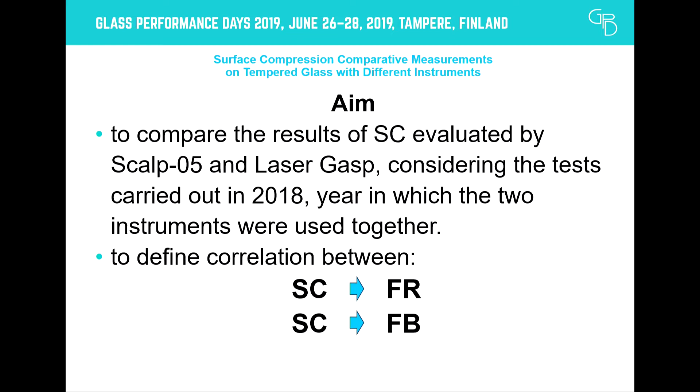The aim, as I told you, was to compare the results of the two instruments, and we took only the tests done in 2018. We focused only on the year in which the two instruments were used together.

That means when we received samples from a producer wanting to do the initial type test, we didn't measure with only one instrument, but with both. Then we tried to define a correlation between the surface compression and the fragmentation, and the surface compression regarding the flexural bending.

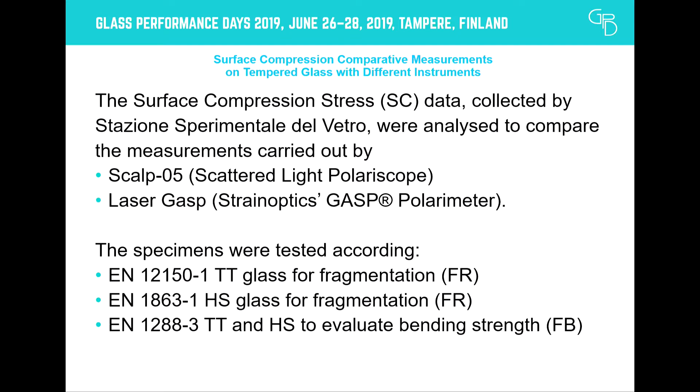The specimens were tested according to the standards 12150, 1863, and then the bending standard 1288-3. The two instruments are these: the Strainoptics GASP Polarimeter, and Scalp.

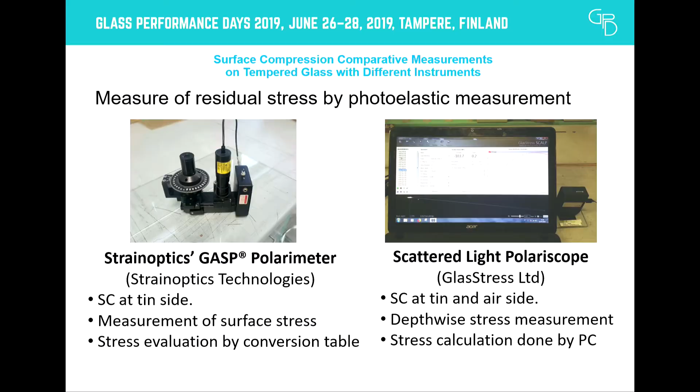I would like to tell you that we were the first to introduce both these instruments to the Italian market, proposing to Italian producers to use them for their factory production control.

You know that the Laser GASP measures only the surface compression on the tin side, while the other instrument measures on both sides.

The stress evaluation is based on a conversion table and a calculation by PC. Then there is another question - sometimes we have an asymmetric stress induced by the thermal process.

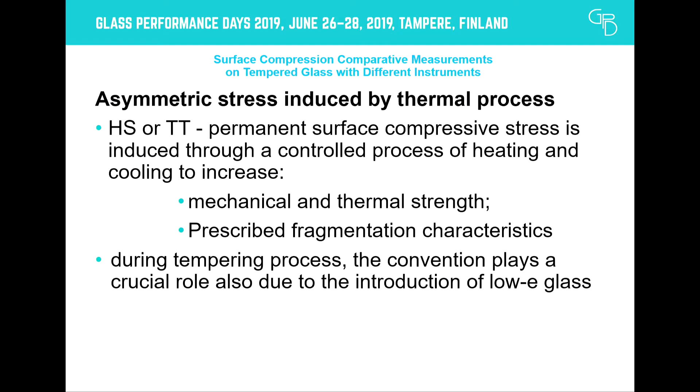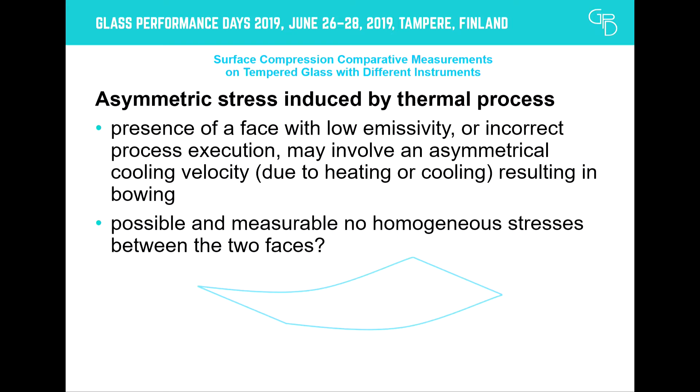This can depend on heating or cooling. During the tempering process, convection also plays a crucial role in the introduction of low-e glass. Sometimes we can have asymmetrical stress induced by the thermal process due to the presence of a face with low emissivity, incorrect process execution that can involve an asymmetrical cooling velocity due to heating or cooling as well, because what is important is the cooling velocity.

And we ask ourselves: is it possible to measure non-homogeneous stress between the two faces if we have this? This is the second part of the work that we have tried to do.

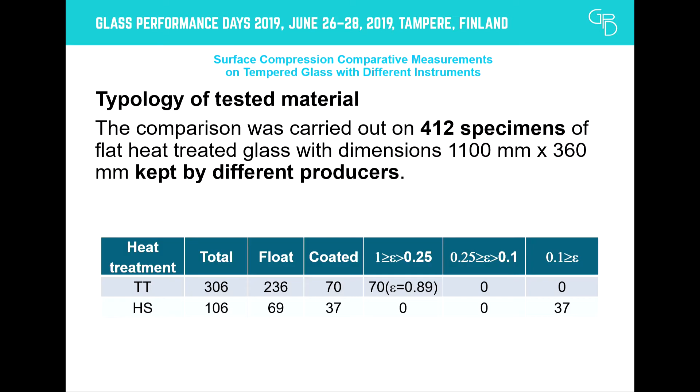These are the samples that we received this year and used to make the comparison. So we didn't produce the samples ourselves, but used the ones we received, so the sampling is not very complete.

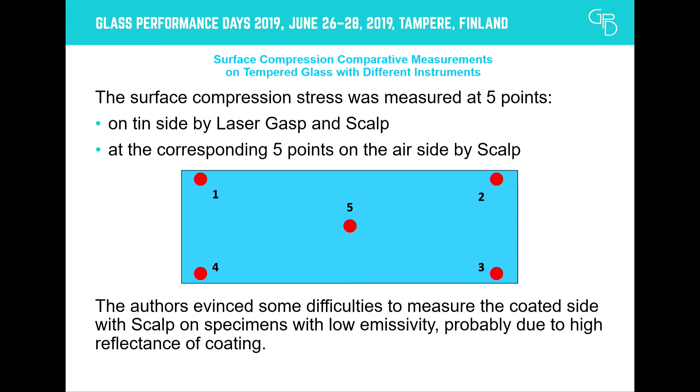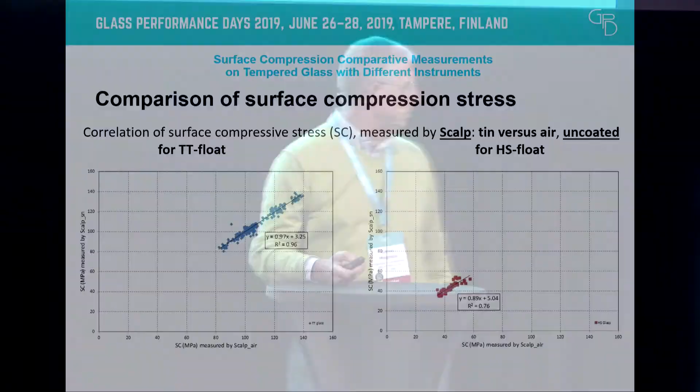And at least this is the correlation, and you see that with the SCALP, the correlation between the two sides on tempered glass is a very good curve. That means that if you measure the tin or air side, we have the same value. This is a very good correlation, and we have the same for the heat strengthened glass.

It's a little bit less, but this also depends on the small number of samples. But anyway, 0.76 is reasonable given this type of question.

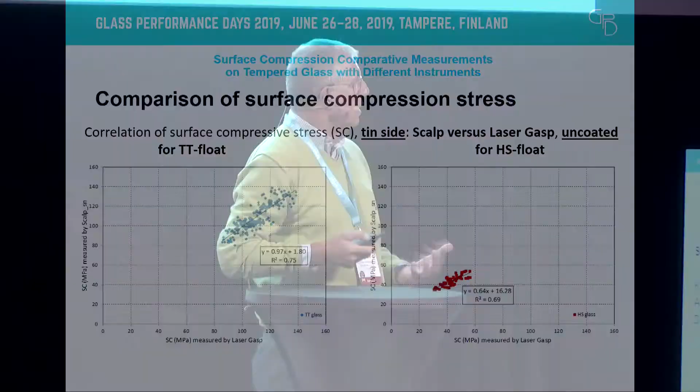Now we go to see SCALP versus Laser GASP for uncoated glass, and you see that the measurement of SCALP and Laser GASP fit with 0.75. So we can say we have good correlation between the two instruments, as well for the heat strengthened glass. But again, the problem is that we have a small number of samples.

Then we go to see what happened with coated glass. You see that on the tin side, the correlation between the two instruments is again good, and at least better for the heat strengthened glass. So we can say you can use one instrument or the other - it's the same. This is the real aim.

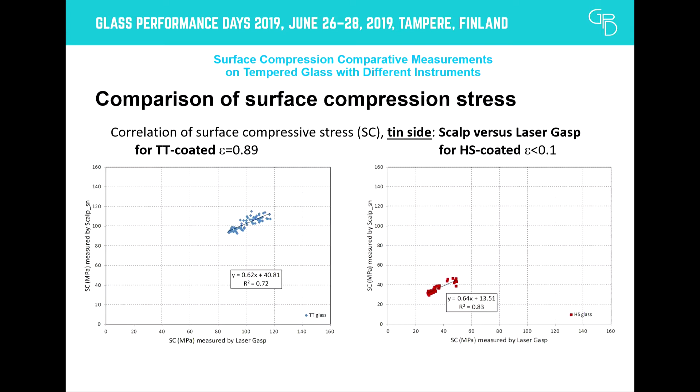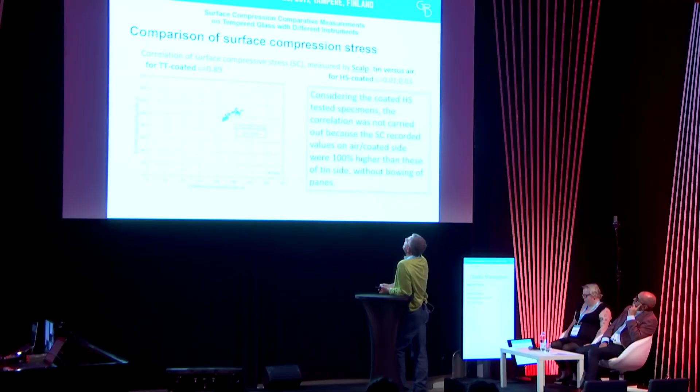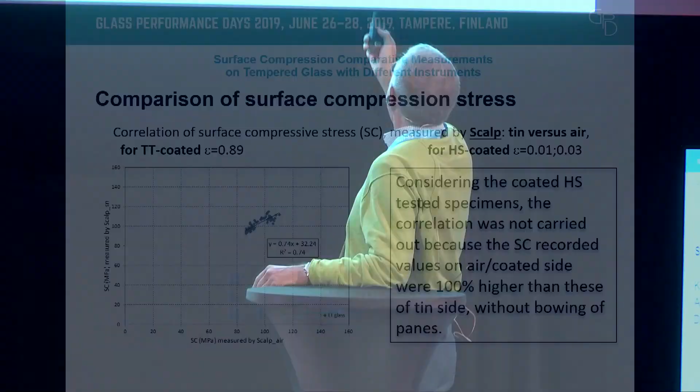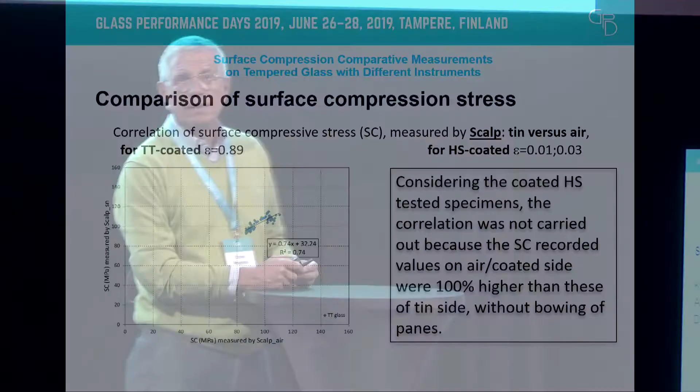When we go to SCALP tin versus air, you see that for coated glass, it works when the coat has high emissivity, pyrolytic coat, just to be clear. When you go to low emissivity, which is confirmed by the people who invented the SCALP, it doesn't work very well - we get very, very high values of measured surface compression.

So there is a caveat: normally this kind of coating is placed on the internal side of double glazing, if you have to measure in situ. So you cannot measure it if you have to make an expertise. But I know that my colleagues are working to elaborate on this.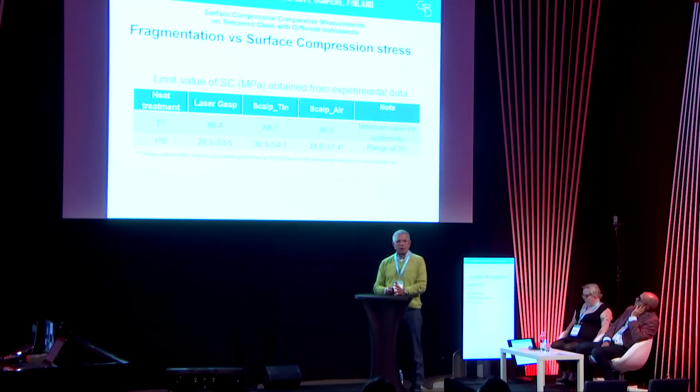Indeed, I'm not sure these values are very much in the safety area. In previous work, we proposed to stay always over 90, but okay, it's nothing, that's not true. And for coated glass, we also proposed to stay over 95 for certain kinds, but it's not the case here to speak about.

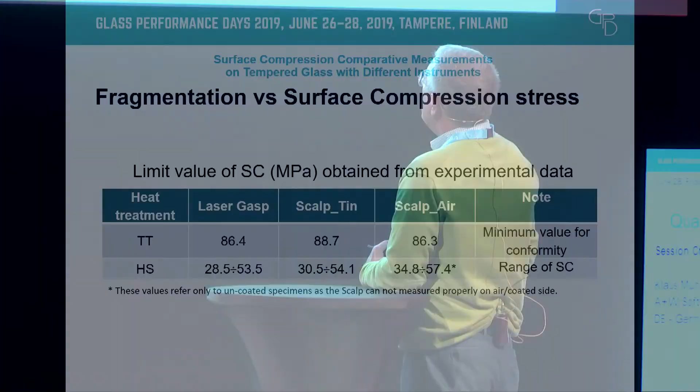For heat strengthened glass, we say that all the samples we tested stay in that range, okay? That doesn't mean you cannot have conformity at lower or higher values. It means that the samples we have and measured have this value and are conformant to the requirements.

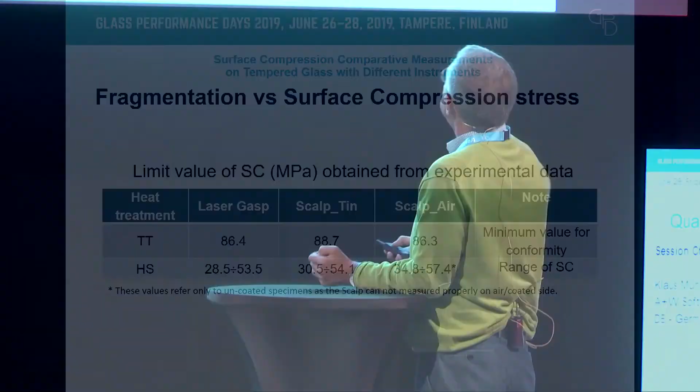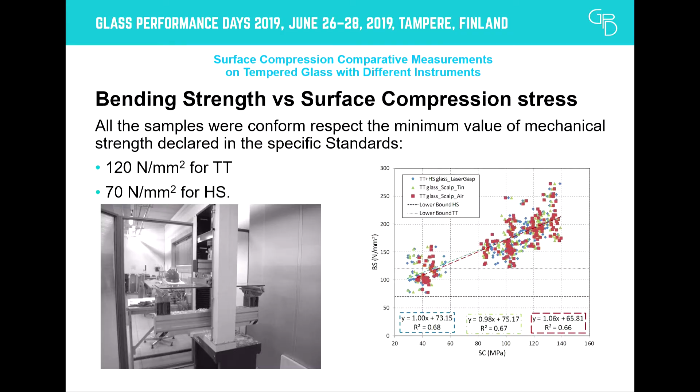Okay, and these are the correlations with the bending test according to standard 1288-3, and you see that the R-squared values here are 0.68, 0.67, 0.66. So they fit very, very well with each other.

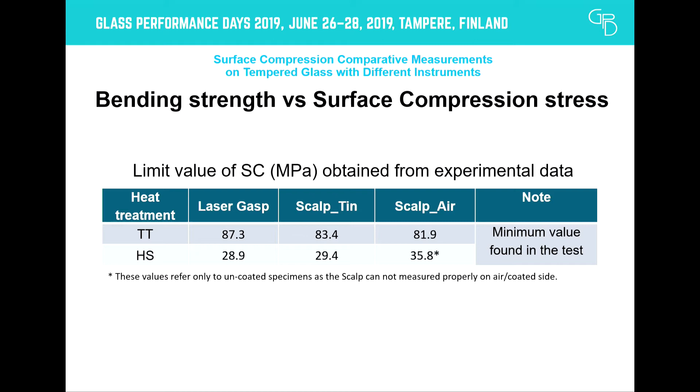This is the limit value to have the minimum conformity, but we don't suggest using this value. To be sure, we suggest to stay more than 90.

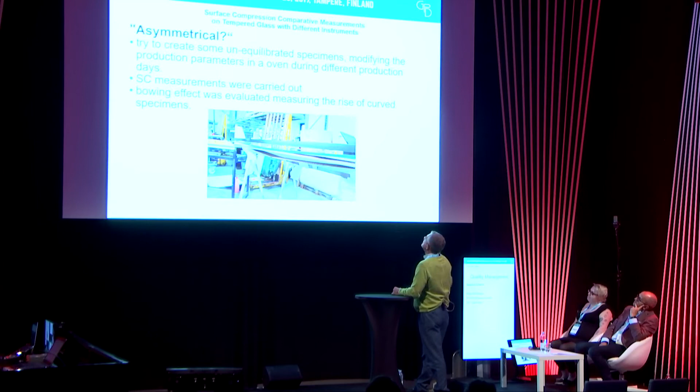We see that the overall bow we were able to create, we arrived till 19 millimeters. You see that we have some difference between tin and air with scalp, in the two surfaces. But in most cases, we don't appreciate a lot of difference, especially with small bow. And my friend from Laser Gasp scalp production, they say it's clear. Why? Because even when it is curved, the two surfaces should be in equilibrium, so it's not so easy.

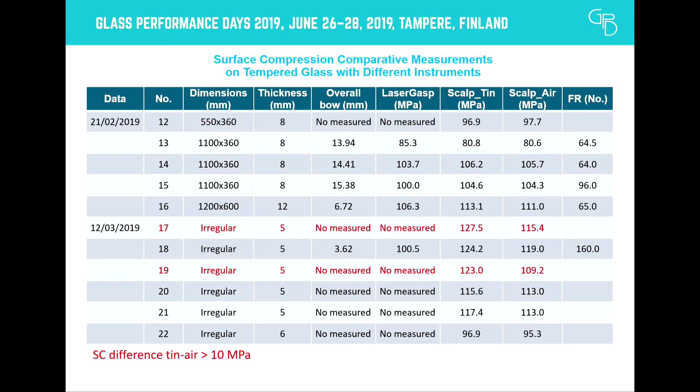But sometimes we see that we have at least 10, 15 MPa of difference, that is something appreciable. But you see the value of the bow is very different. And you see here again, some difference. So the conclusion is...

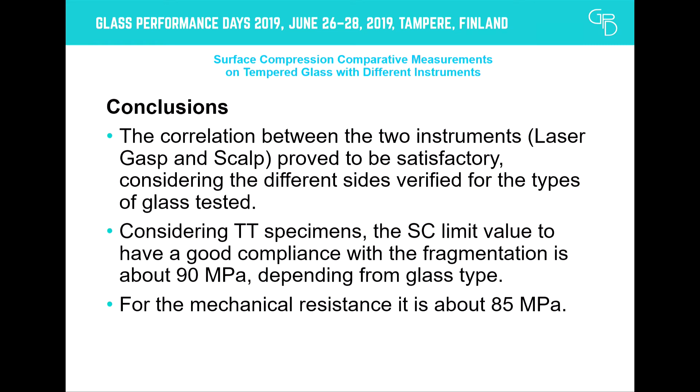The correlation between the two instruments proved to be satisfactory, considering the different sides verified for the types of glass tested. Considering the TT specimen, the SC surface compression limit value to have good compliance with the fragmentation is about 90, depending on the glass type, and for the mechanical resistance it is about 85.

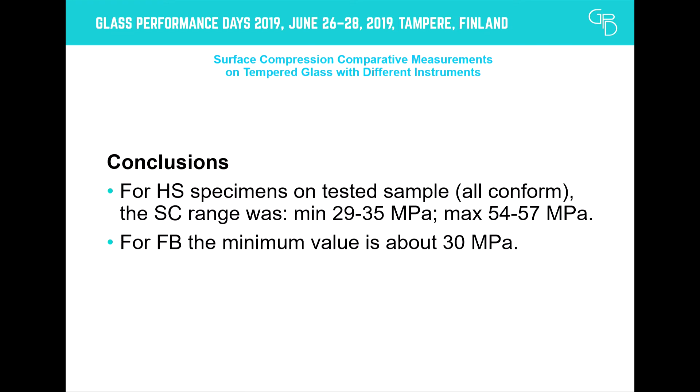And for heat strengthened, the range that we measure on the sample that we have - and I want to repeat that this doesn't mean you cannot have conformity with different values - are between 2935 and the maximum is 5455, and for the minimum value of fracture is 30 megapascal.

So all these values are in good accordance with our previous paper, and the attempt to produce glass specimens with different surface compression between the two sides, forcing the production parameters, gives values with differences not too high despite the very high overall bow. Finished. Thank you.

Okay, Mr. Mognato. Thank you Mognato. Mognato, Mognato, yes. It's okay, perfect. Thank you. Sorry, Mognato. Yeah, GN, okay.

Any questions from the audience to this presentation? Okay, there's one. But wait a second for the microphone, please.

When you measured using the new instrument for both sides, and you found the overall bow, did you check the center tension and see if it was off center, and that's what gave you the differences?

Did you think that if it is in the center or on the side - center, or maybe off center? No, the value that we put there is the medium value. Okay, the medium value.